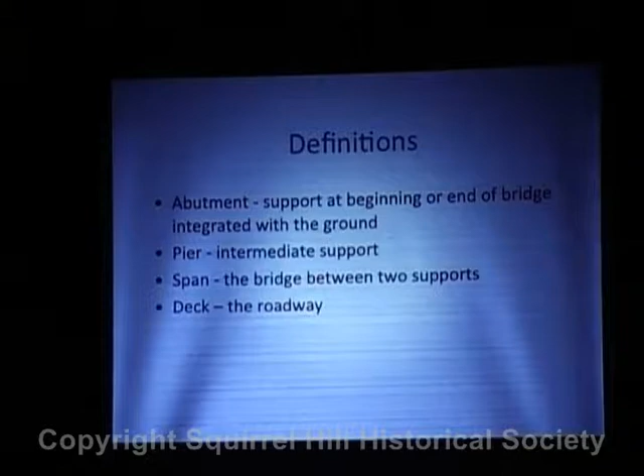So part one, introduction to bridge types. Now, before I go into this, I just want to give a few definitions. An abutment is the support at the beginning or the end of the bridge integrated with the ground. The pier is the intermediate support of the bridge, so the abutments are the end supports, the pier is anything in the middle. The span is the bridge in between the supports. And the deck of the bridge refers to the roadway of the bridge.

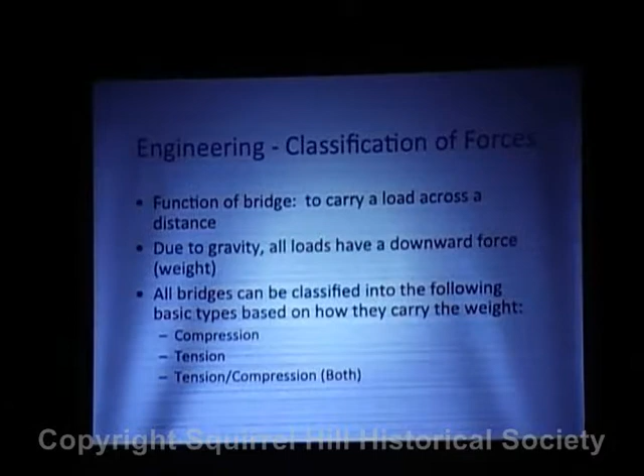So engineering, classification of forces. The function of a bridge is simply to carry a load across a distance. Due to gravity, all loads have a weight, and bridges can be classified based on how they carry that weight. Now, you've probably heard presentations talking about a visual approach to classifying a bridge: if you see this shape, then it's this type of bridge. Well, as an engineer, I can tell you that's not the case. Based on compression, tension, or a combination of both, as well as other configurations, you can accurately classify bridges.

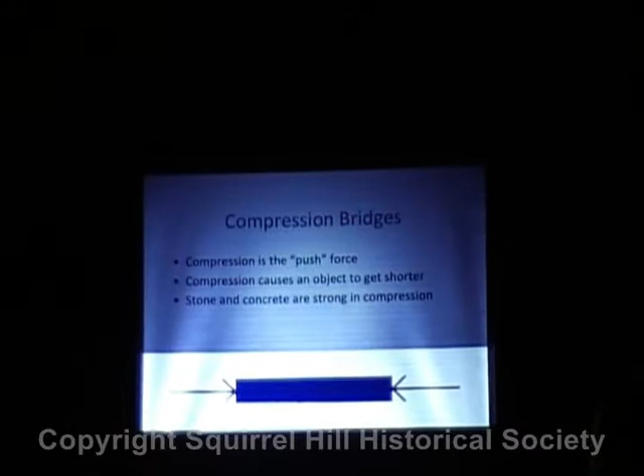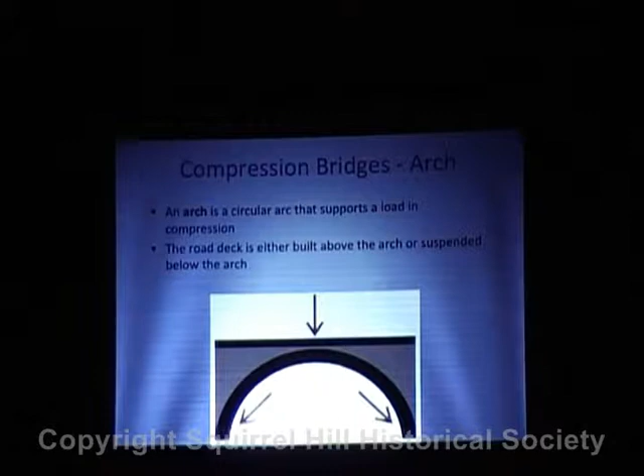Now, a tension bridge is a bridge which is supported by this pull force, tension. Tension causes the object to get longer. Materials strong in tension include wire rope, eye bars, and rods, like steel rods. You think about a rope. If you push a rope together, there's no strength. But if you pull it apart, you get the strength.

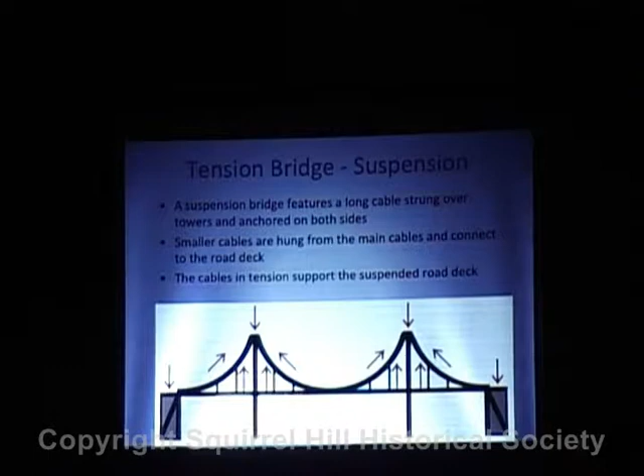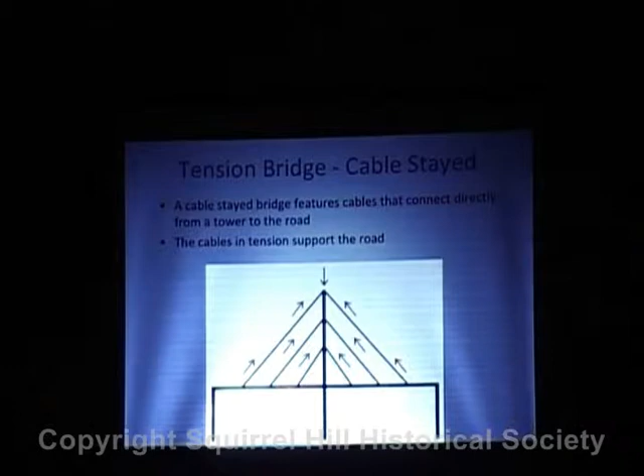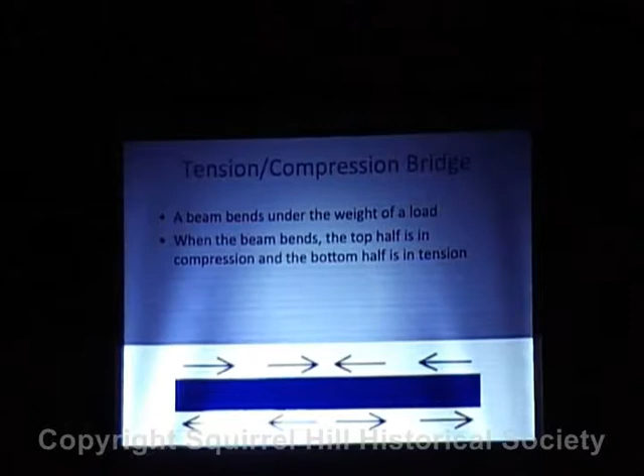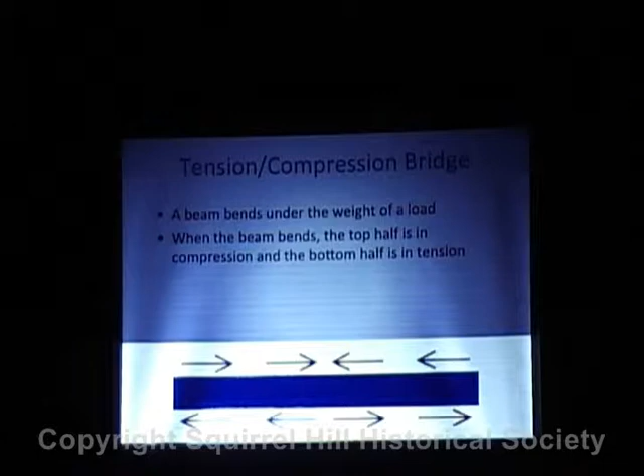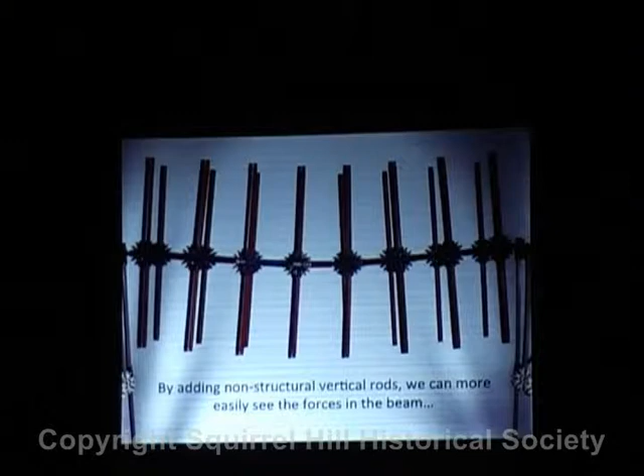Now, tension compression, what does that mean? Well, when a beam undergoes a load, the top of the bridge is in compression, and the bottom of the bridge is in tension. Now, I know that concept is a little hard to see, so I made a little model. This is just the simple kid's toy, K'NEX. I've added vertical rods, and this will just show what's going on with the forces. These rods have no structural function.

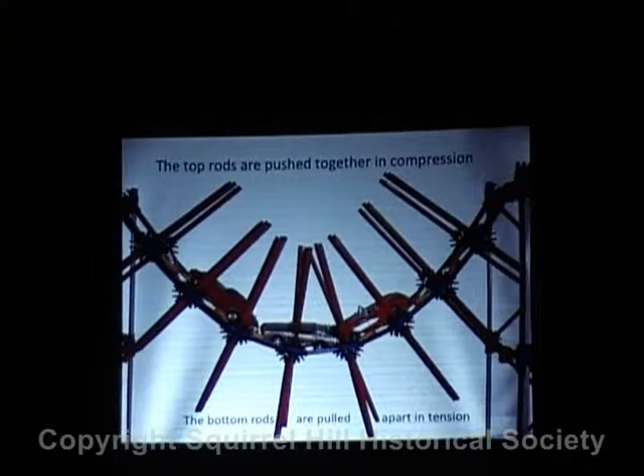Now, I'll apply a load, and as you can see, the rods on top come together, compression. The rods on the bottom are pulled apart in tension. So beam bridges exhibit both. Here's an example of a beam bridge. This is a concrete box beam.

Another example of a tension compression bridge is a truss. To achieve greater and greater strength, a beam needs to be taller and taller. However, a tall beam uses a lot of material and is very difficult to erect. If you consider transportation technology in the 1800s, you couldn't bring in a several-hundred-foot-long girder that's 20 feet high like you can today. You couldn't put that on the back of a horse and buggy. So engineers came up with truss bridges, where you take materials, put them together like an erector set, and come up with a bridge. And these trusses are distinctive with their triangular shape.

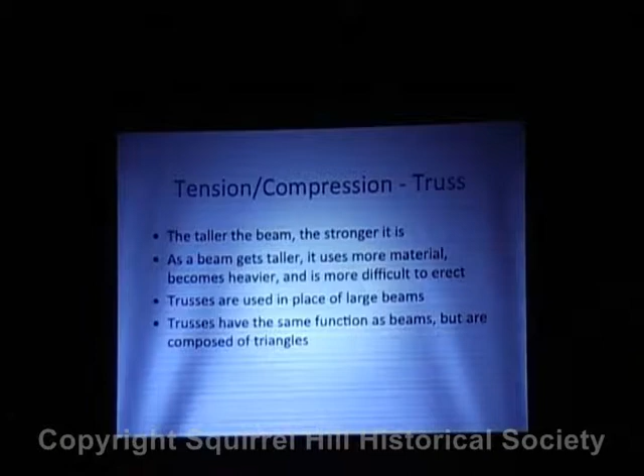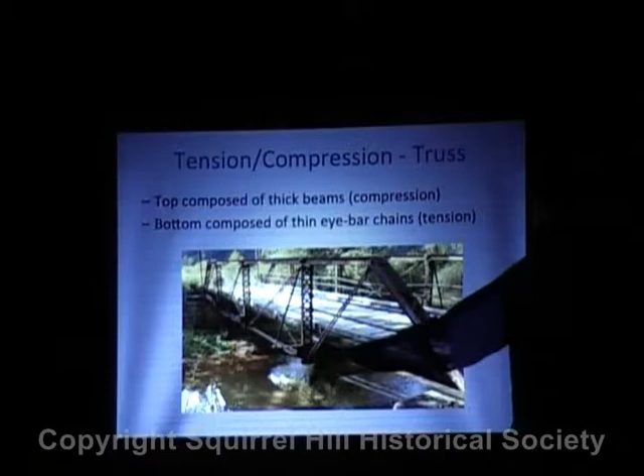Here's an example of a late 1800s truss bridge in Washington County. Note that the top of the bridge has thick built-up members in compression, and the bottom of the bridge has these thin eye bars in tension.

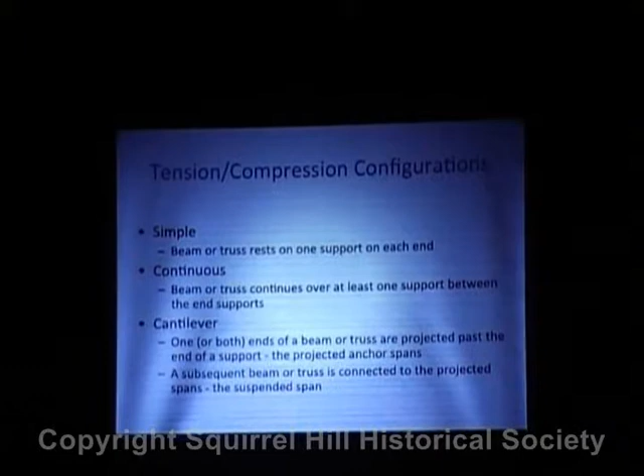Now, these beam bridges have a few different configurations. If the bridge is simple, the beam or truss rests on the support at each end. If it's continuous, the beam or truss continues across at least one pier. And if it's a cantilever, two beams are projected outwards over a pier, and then there's a center span that's hung from these projected spans. The reason you do that is it gives you a longer span length.

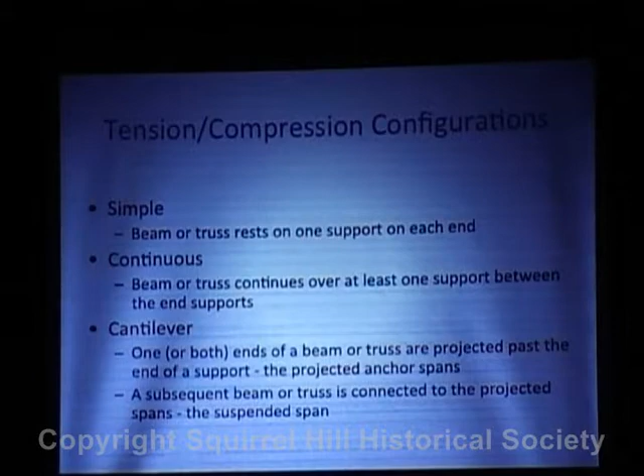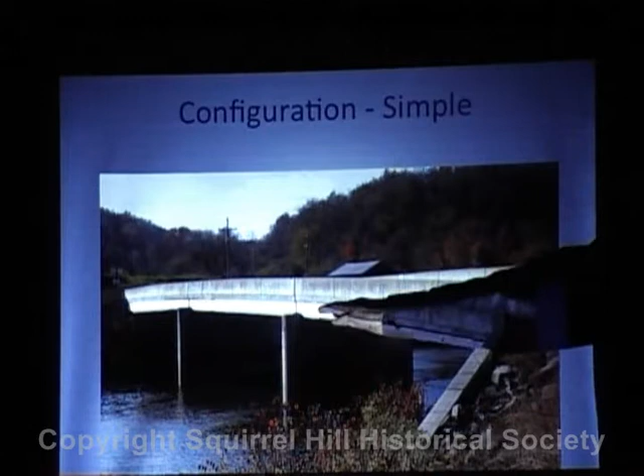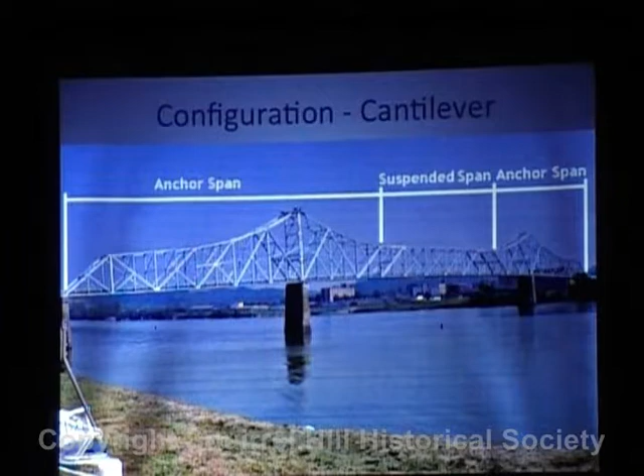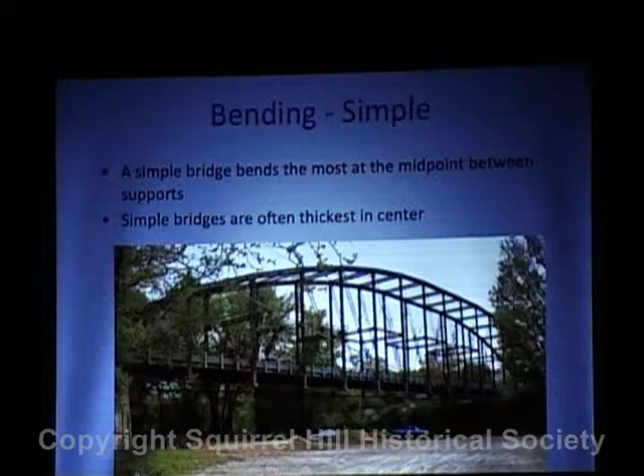Now, any comparable bridge you see that has a flat top, well, it's inefficient, using materials where you don't need it to be nearly as thick on the ends. Now, this bridge has a main span of over 400 feet, which is why it needed to be thicker at the top. Now, just go back for one moment, please.

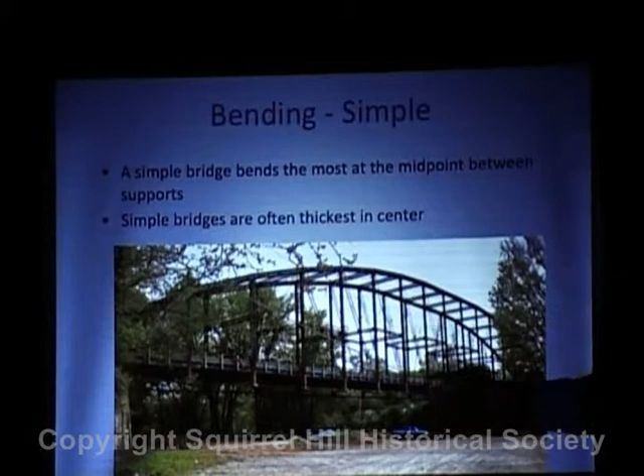One thing I want to note about this bridge, it is not an arch bridge. Even though it has a circular top, it's not because of compression, it's because it's curved upwards to counteract the larger force pushing down in the middle.

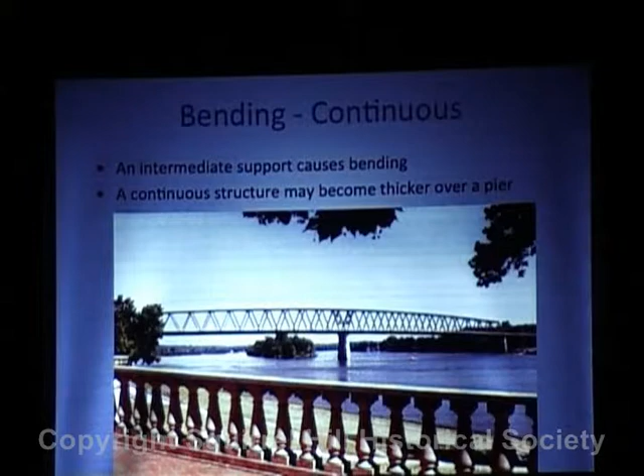For a continuous bridge, there will be bending over an intermediate support. If you're loading the bridge here and you're loading the bridge here, you'll have a bending action over that support. So, therefore, they may be thicker over that pier. And with a cantilever bridge, it's the same thing, where again, you have bending over these supports for the suspended span. That's why they need to get taller at the tower.

Now, if any of you have ever seen our materials for Beaver County, in their logo they show a suspension bridge. But the bridge they're actually talking about is a cantilever bridge. Cantilever bridges have towers, suspension bridges have towers. But you can see it's because of the bending that the cantilever bridge needs to have a tower.

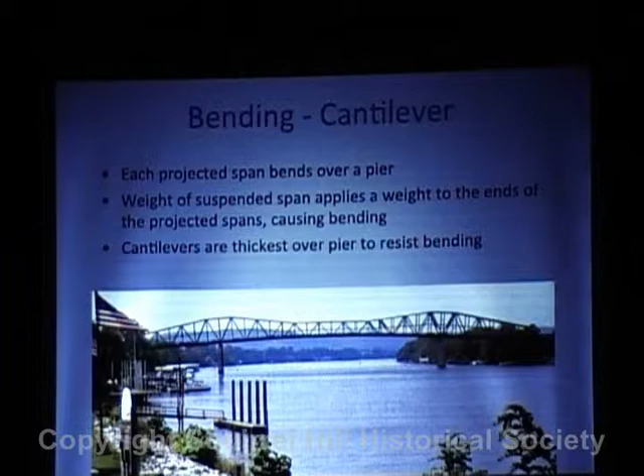Can I ask a question? Yes. When do you choose what type of bridge you're going to put over that water or railroad or whatever you're using the bridge for? Well, a lot of times it's based on the site conditions, where if you need vertical clearance underneath the bridge for, say, a railroad or for navigational clearance for a river, you tend to go with a bridge like a through or a pony where the support structure is above the road. If the bridge is higher, like over a valley, it makes more sense to put the support structure below.

Now, the difference between pony and through is that ponies are typically smaller bridges and throughs are typically larger bridges. And with a half-through, this type is built so rarely that it's a very special case where you'd see them. In all of western Pennsylvania, there are only 2 examples. And it's a situation where it helps to have some of the bridge below the road, but maybe you can't fit all of the bridge below the road because of clearances.

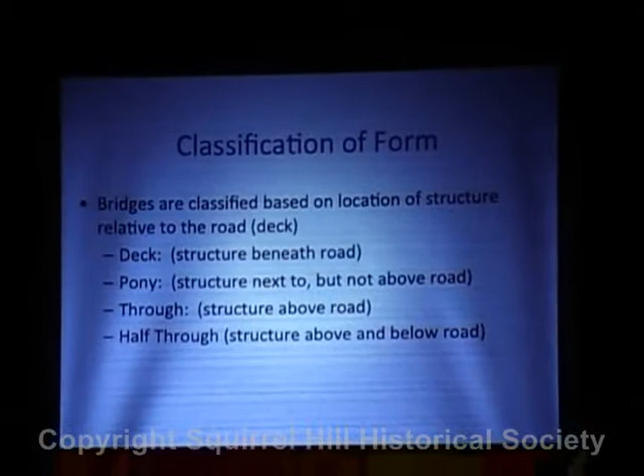What about the covered bridge that used to be, and you don't see anymore? Covered bridges are through truss bridges that just have a covering to protect the wood. So typically covered bridges are simple through trusses. Why was the covered bridge built?

Because of early materials. You have a lot of trees growing near the bridge, and when you're talking about the 1800s, where you don't have a lot of materials either at the site or easily accessible to the site, you cut down trees and build a bridge. You cover it up so the wood doesn't rot. Just like with stone bridges, you could quarry the stone near the bridge, but with steel bridges and concrete bridges, you needed more equipment, factories to get that material and bring it to the site.

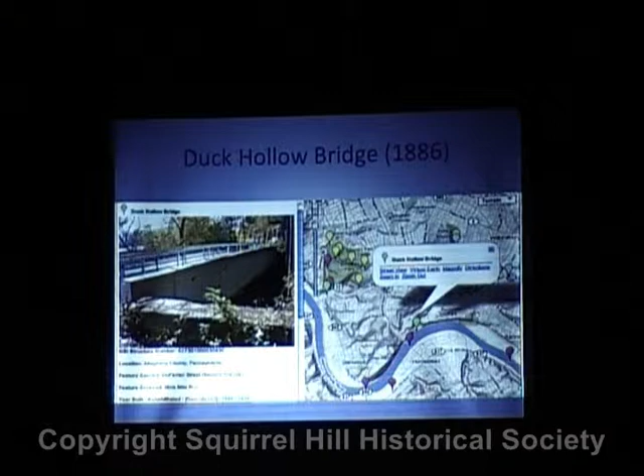Now, the bridge carries McFerrin Street, which used to be 2nd Avenue. 2nd Avenue used to run all along the river through 9 Mile Run. There were even connections through what is now Frick Park up to Regent Square. And the bridge was constructed in 1886 and rehabilitated in 1936. Now, I can't find any account to really determine how much of the bridge was rehabilitated or reconstructed. I'm not convinced that the support structure of the bridge is from 1886, but I can't prove or disprove that.

Now, this bridge is actually eligible for the National Register of Historic Places because it was one of, if not the first bridge, to use an open grate deck. In Bob Regan's Bridges of Pittsburgh book, he does state this is the first bridge ever built with an open grate deck. The original wooden deck was washed away in the Great Flood of 1936, and it was replaced by a grate deck.

Now, the bridge is also located in a very important historical site, the mouth of 9 Mile Run at the Monongahela River, which is known as Brown's Landing, near the Highland Station of the B&O Railroad. And salt works operated in that area in the mid-1800s.

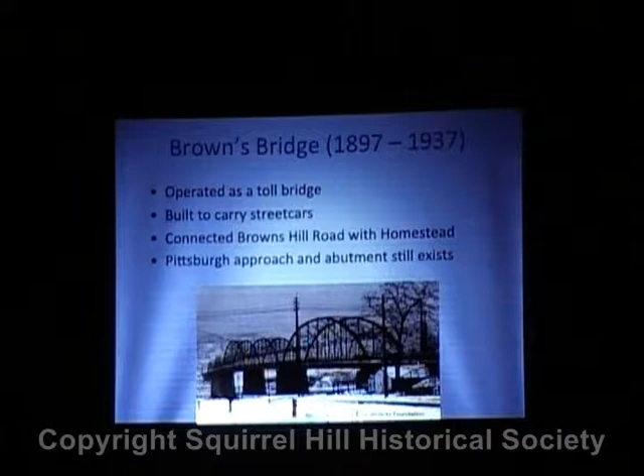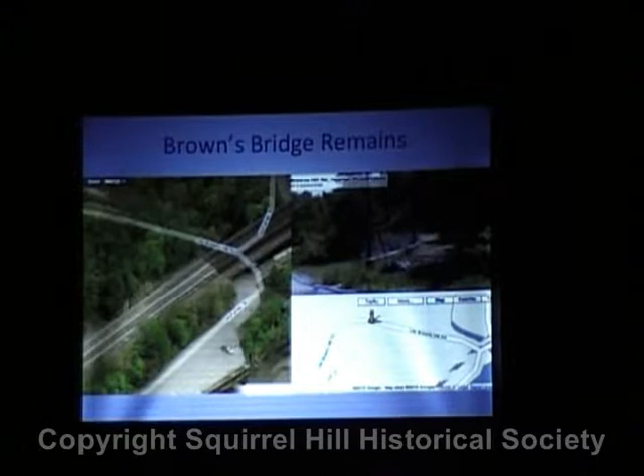You're saying that's the approach to the old bridge? Yes, the old road came up here, and right here is this abutment, crossed the railroad tracks and went across the river to Homestead. Can you easily see it, or is it covered? Well, it's very difficult to see it from the Squirrel Hill, Hazelwood side, because of these active railroad tracks, and then there's a drop, so these trees tend to obscure the view.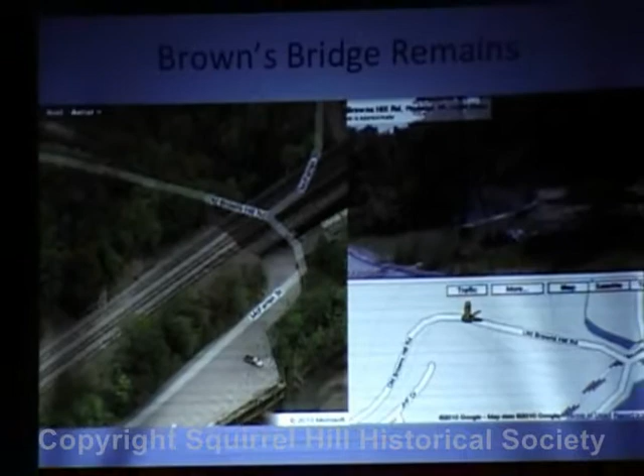If you're interested in seeing it, you could, I guess, park on Old Browns Hill Road or walk up Old Browns Hill Road and walk along the old alignment. And you can also see the stones from the other side of the river. So if you're dining at Uno's or Eden Park, you can look across and notice that abutment. That's actually the first time I noticed the abutment. Now, that bridge was replaced in 1936 by the Homestead High Level Bridge that we all know and love.

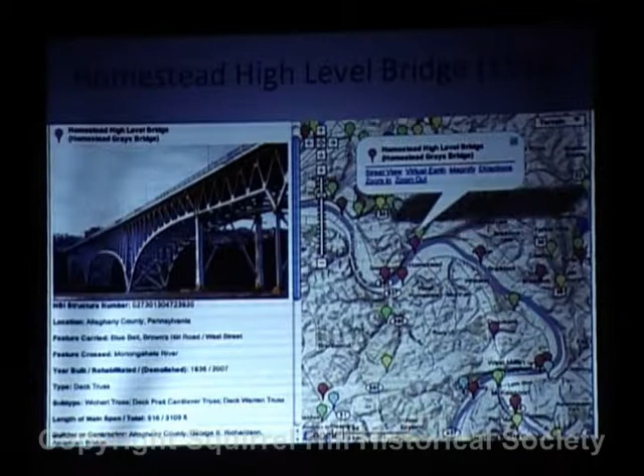The bridge was built from '35 to '37. Now, the bridge was designed in-house by Allegheny County. At one point, Allegheny County had about 100 engineers working for them. It was part of County Commissioner Joseph Armstrong's ultimate highway system of 1924, where he reorganized the county's Department of Public Works and decided that the engineers were going to work for him and completely eliminate the need for engineering consultants.

Now, I work for an engineering consultant, so, now...

While the County Department of Public Works got really big at that time, there was also a lot of patronage and scandal. As a result, the Democrats were able to unseat the Republicans at the time, which has held true ever since in this area. And they were going to shut down the large Department of Public Works.

But then with the Great Depression, the federal government for the first time started paying for infrastructure improvements. And as a result, since Allegheny County taxpayers no longer needed to pay for all this work the county was doing, the Department of Public Works stayed large and still built very innovative bridges through the Second World War. The bridge is also noteworthy for being over 3,000 feet, one of the 10 longest bridges in the country at the time, and has two main spans of over 500 feet.

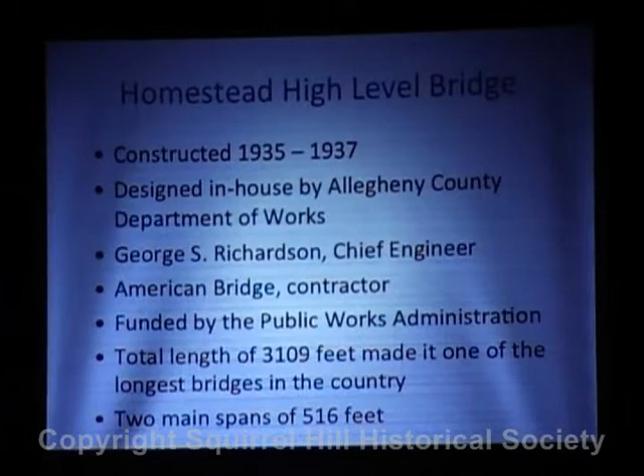Now, what's really significant about the bridge, if this isn't significant enough, is this Wichert truss. And I pronounce it Wickert because anyone I know who worked for Allegheny County pronounces it Wickert. This was the first ever example of a Wichert truss. Now, the Homestead High Level Bridge is a continuous truss, where you see the trusses continue along over piers. The problem with a continuous truss before computers is if there's a truck before a pier, what's going on with the bridge after the pier or after the next one? It was a very difficult problem, and as a result, engineers never really built continuous truss bridges.

So what Wichert developed was a diamond shape that is hinged. There's two hinges here, it's hinged here, two hinges here, and here. And what all those hinges allow is for each of these members to move. Now, I'm sure you've sat on the bridge and you feel it. This is why, because of all these hinges. As a result, if there's a truck loading this span, that span isn't affected. Each span on a continuous truss is statically determinate. So that's the advantage of this type, and about 5 other bridges like this were built.

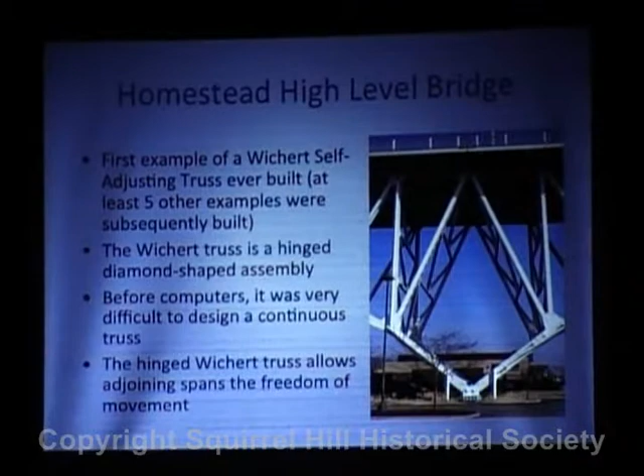Are they built for structure or aesthetics? Predominantly bridges are built for structure. The only time bridges were built for aesthetics were from the city of Pittsburgh and Allegheny County between, say, 1910 and 1940. And at that time, at least the city had a very influential art commission that mandated the design of bridges. The 6th, 7th, and 9th Street bridges were supposed to be truss bridges, but the art commission said no, throw those designs out. We want suspension bridges. So that's why they look the way they do.

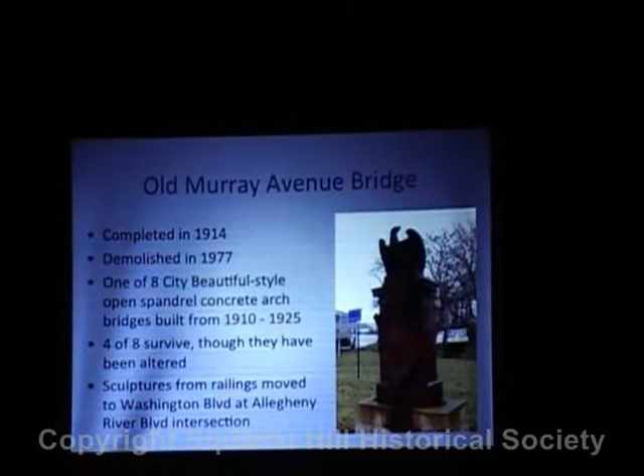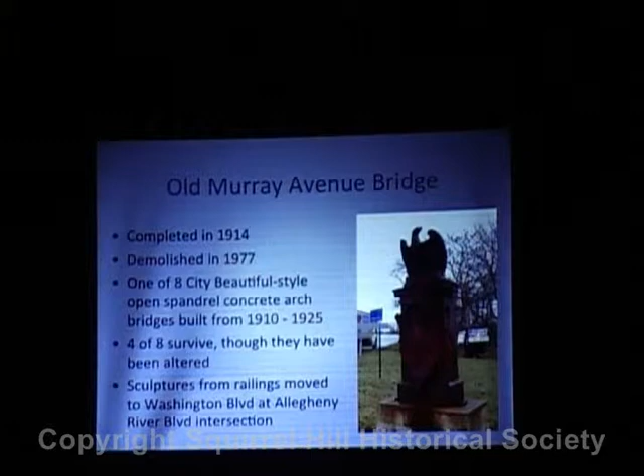Now let's talk about the Old Murray Avenue Bridge. This sculpture here is from the Old Murray Avenue Bridge. The structure was completed in 1914 and lasted until 1977. Starting in about 1910, going through the mid-1920s, the city of Pittsburgh built 8 City Beautiful style open spandrel concrete arch bridges. Only half of them still survive. These sculptures were moved to the intersection of Washington Boulevard and Allegheny River Boulevard. And on the next slide, there's an image of the bridge, and you can see the sculptures right here.

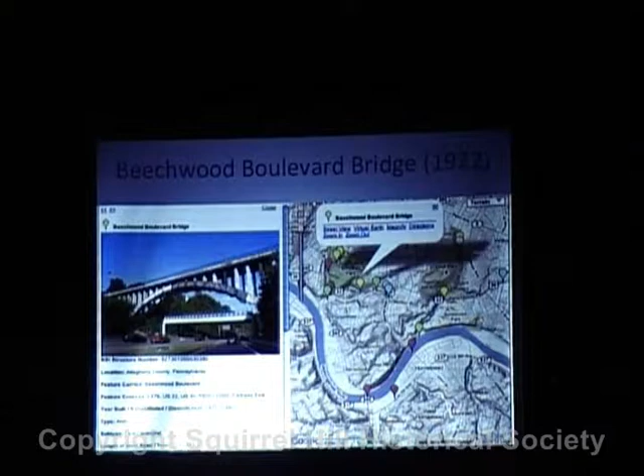Now, another one of these City Beautiful concrete arch bridges is the second Beechwood Boulevard Bridge. And I say Beechwood Boulevard Bridge rather than Greenfield Bridge because it's inscribed in the plaques, Beechwood Boulevard Bridge. Well, since then, the city has erected a sign that says Greenfield Bridge. So call it what you will.

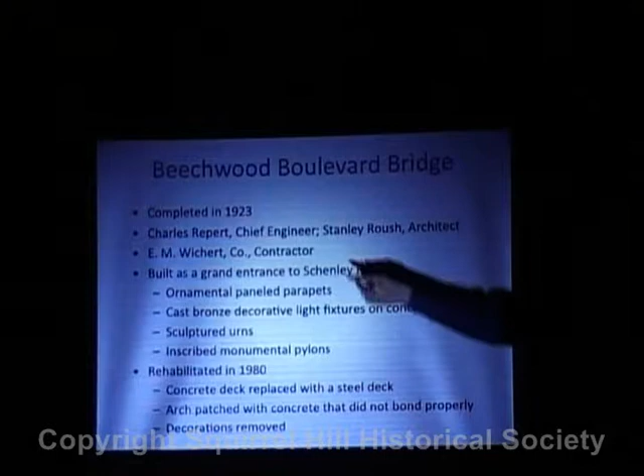Now, the bridge was completed in 1923, and the contractor was Wichert, the same guy who invented the Wichert Truss. Now, the bridge was built to be very beautiful, to be an entrance to Schenley Park. They had ornamental panel parapets, cast bronze light fixtures, sculptured urns, and these monumental pylons, which still exist.

Now, in 1980, the bridge was rehabilitated, everything but the arch was stripped, and a new deck that's made of steel that didn't match the original bridge was installed. The arch was patched, and unfortunately, the concrete they used to patch the arch didn't bond properly. That's why all that new concrete is falling off the bridge.

Now, keep in mind that arch is about 20 feet tall. So says my friend who was working on the project. So the bridge can still lose a lot of concrete and still be strong.

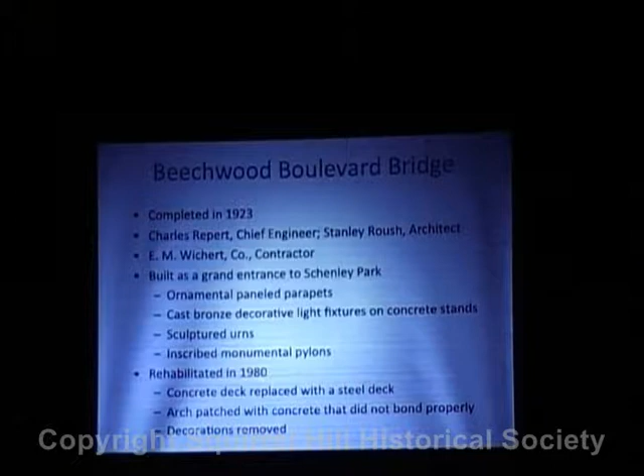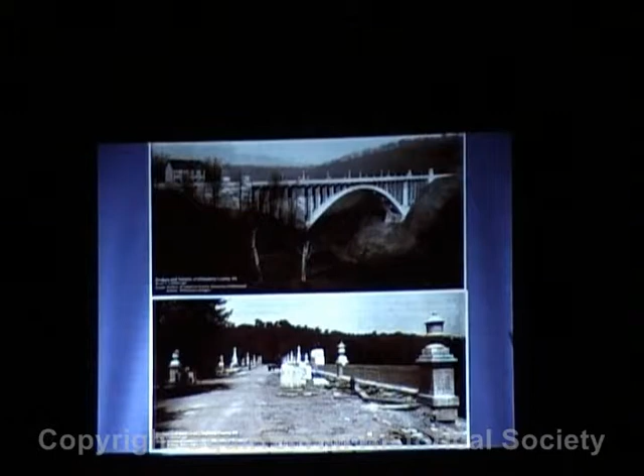And here are pictures of what this bridge used to look like. You can see how the urns and lampposts went across the entire deck of the bridge. Now, compare this with the view today. Oh, wonderful.

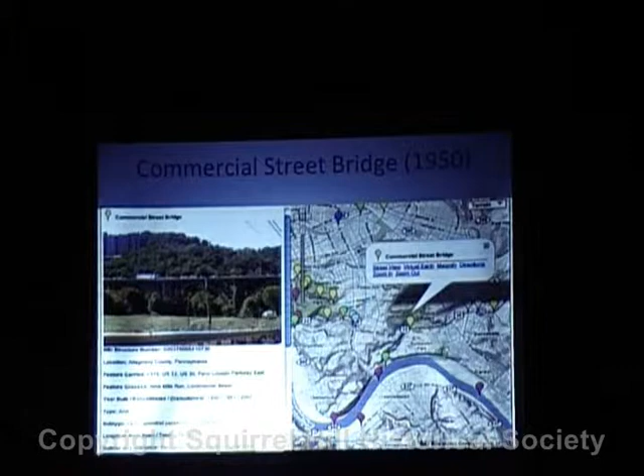Another notable bridge is the Parkway East Commercial Street Bridge, which was completed in 1950 and built by the state. After the Second World War, the state got a lot more involved with building new infrastructure and major roads. And the bridge is one of only 2 concrete arch bridges built for the Parkway.

Another one of the Parkway East bridges is the Fraizer Street Bridge, which is an example of a deck truss, and it was also completed in 1951. Now between that bridge and the bridge over Saline Street in the 4-mile run section, they're the busiest bridges in our neighborhood, carrying 120,000 cars a day.

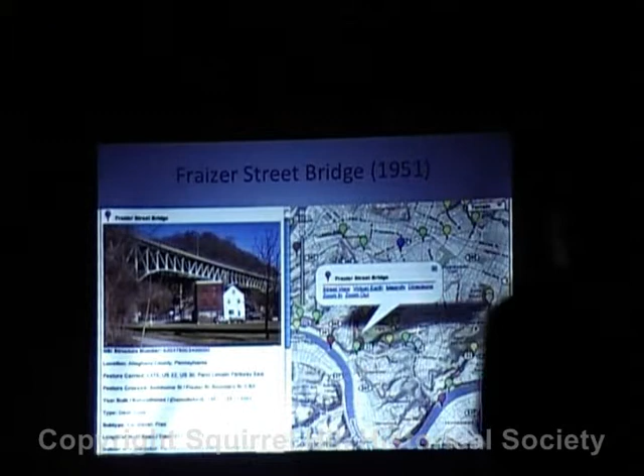Now this bridge is actually, and if you go back one slide please, the bridge is actually composed of 2 parallel bridges. You look, there's a line here where the bridge on this side is separate from the bridge on the other side. And it's the longest parkway bridge over the valley, and the bridge, as well as all of the parkway's original structures, are eligible for the National Register.

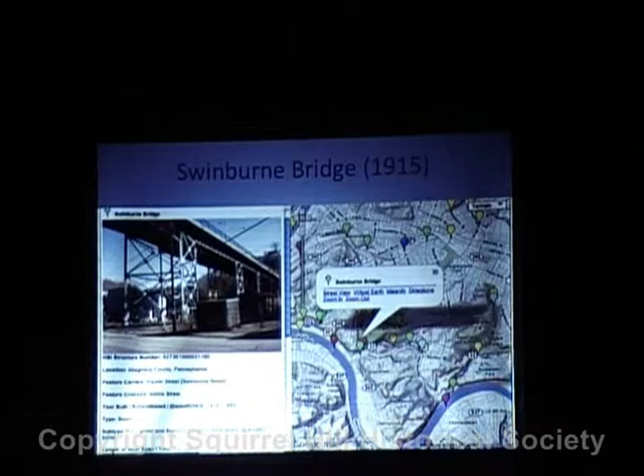Now the Swinburne Bridge, which is perpendicular to the Fraizer Street Bridge, you can see that here, actually carries Fraser Street, where Fraser Street is perpendicular to Swinburne Street, and part of Swinburne Street was demolished when they built the Parkway East. So that's why if you're on 2nd Avenue, you'll see Swinburne Street reappear.

Now it replaces a previous trestle, and this bridge is built as a combination of girders above and below the road. Now, most of the old city bridges were trestles. This is the last one that's left.

Now, in Schenley Park, the original Boulevard of the Allies Bridge was the Wilmot Street Bridge, and it was built in 1907, an example of a large arch bridge, one of the few metal arches rather than concrete arches. The reason this bridge was a metal arch is it was so much bigger than the other arches built at that time, and it lasted until 1939. It was replaced by the current Charles Anderson Memorial Bridge.

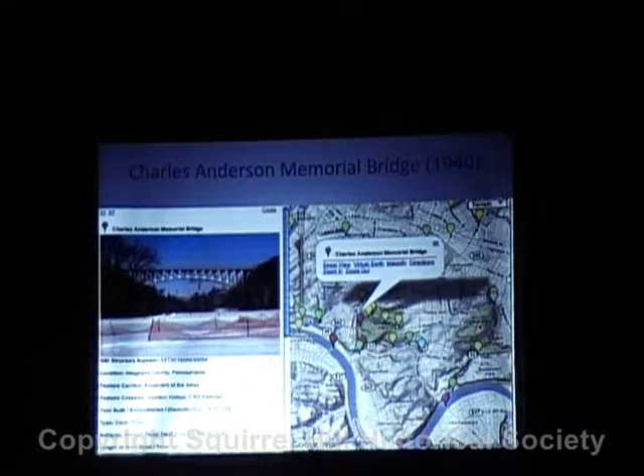Now note with this bridge, you have the open diamonds like the Homestead High Level, because this is our region's other Wichert truss. And by the way, the stone piers for the Wilmot Street Bridge still remain, so if you're walking on the trails in Schenley Park, you can see those stone piers. The bridge is noted for its Art Deco style pylons and railings.

And Charles Anderson was a plumbers union labor leader, a supervisor for the Department of Labor during the First World War, and then at the Pittsburgh City Council. And here's what the bridge looks like today. The original railings are still here, as well as the Art Deco pylons.

Now let's talk about the bridges of Schenley Park, including some bridges that are actually in Squirrel Hill. Now the land was known as Mount Airy, and it was owned by the Captain Edward Schenley family. Now in the 1860s, Councilman William Phipps proposed that the land, which was still undeveloped, or maybe there was some light farming, but it wasn't developed as some of the other area around it, would be converted to a park. There was a referendum, and the residents said, well, we don't need a park. We could just go out a little bit. There's plenty of woodlands. Why do we need land to become a park?

Well, in the late 1880s, development was encroaching and the land was actually considered for housing. So Edward Bigelow, who was the director of Pittsburgh's Department of Public Works, raced to London, literally raced to London, to be there first to convince Mary Schenley to donate or sell the land as a park, and some of the land was donated, some of it was sold. Now the original bridges in the park were rustic bridges. They were constructed of wood.

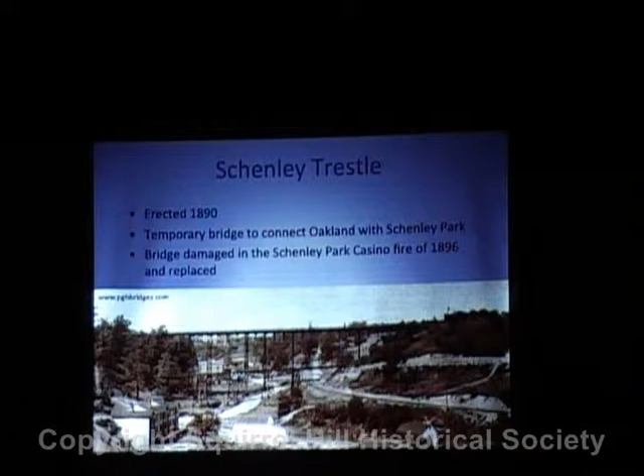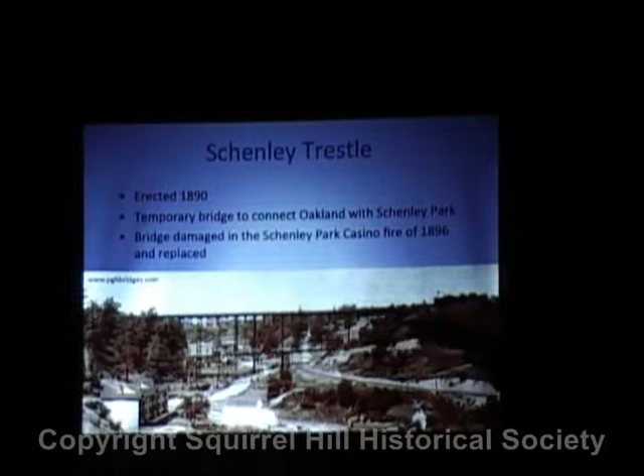Now, one of the first bridges built into the park, notice it was built in 1890, where the park was established and was purchased in 1889, was this trestle, which you can see is definitely not suitable for modern traffic. And when the casino in Schenley Park, which had one of the first indoor ice skating rinks, burned in 1896, it damaged this bridge, so they replaced it.

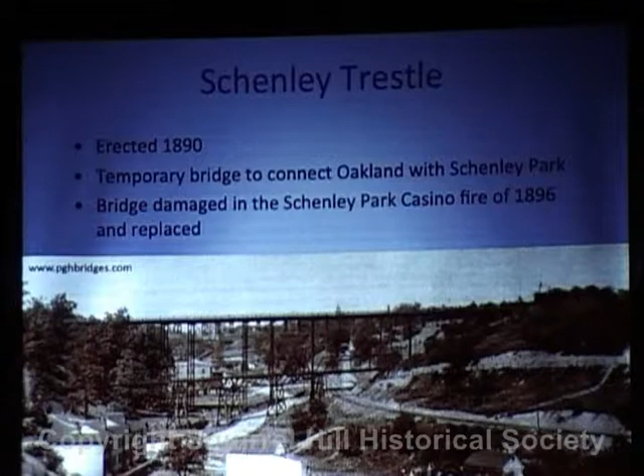By the way, this lower bridge was built as a streetcar bridge for a line that was supposed to go through the park, and Bigelow was successful in getting the line shut down and removed. Now, with the fire damaging that bridge, instead of just replacing that bridge, they decided, let's just build 3 bridges. So the first is the famous Bellefield Bridge, which was between the library and Forbes Field.

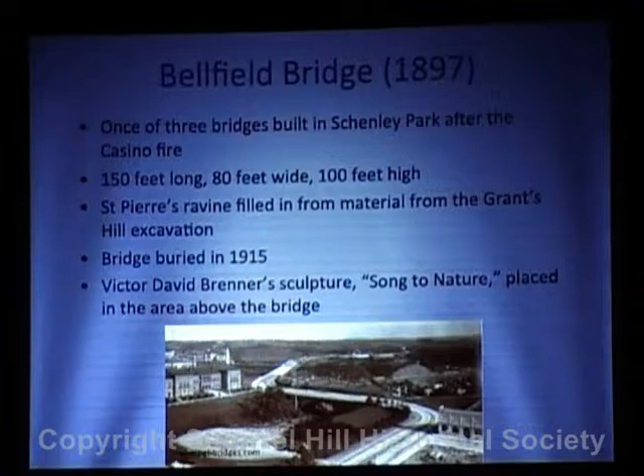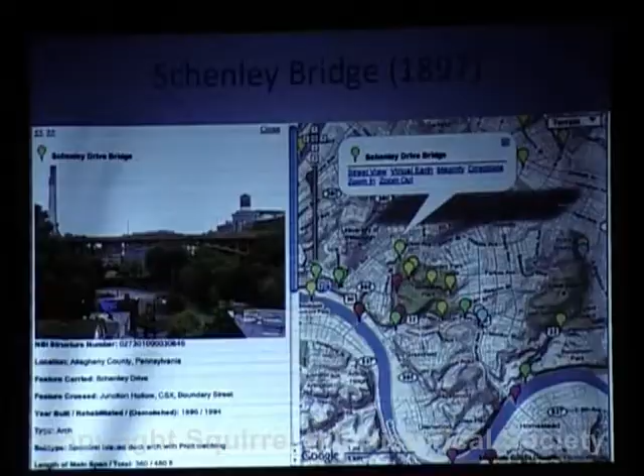Now, in the 1910s, this ravine was filled in by land excavated from Grant's Hill downtown. So the bridge was buried, and now the sculpture Song to Nature is located approximately above where the bridge still stands. Now the next bridge, which also still stands and is a little easier to see, is the 1897 Schenley Bridge. This bridge replaced the trestle. What's really noteworthy about this bridge is it's a 3-hinged arch, and I'll explain that when I discuss the similar Panther Hollow Bridge. The bridge is listed on the National Register of Historic Places.

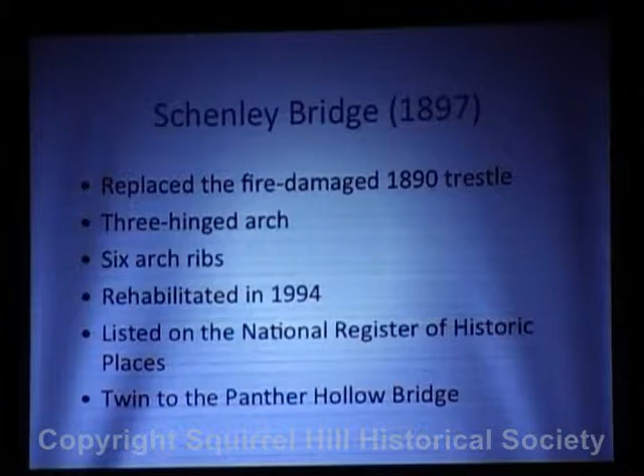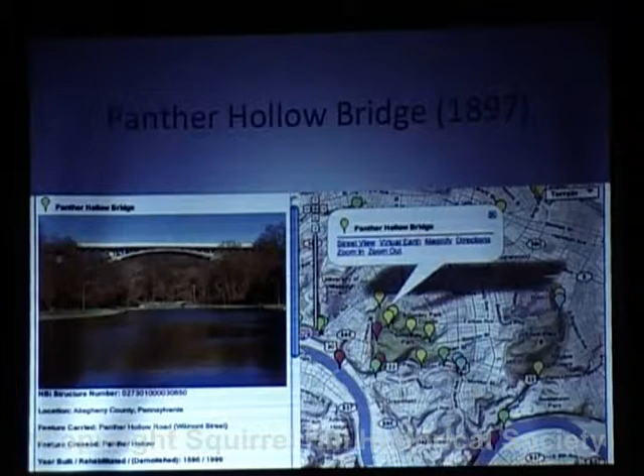What qualifies a bridge to be historic? There's a variety of categories; not every old bridge is historic. Typically, reviewers look for a bridge that was technologically significant, meaning that this bridge had some sort of detail or feature that pioneered or advanced bridge design, or, say, they tried something different which didn't succeed. So some noteworthy feature. Todd, yes.

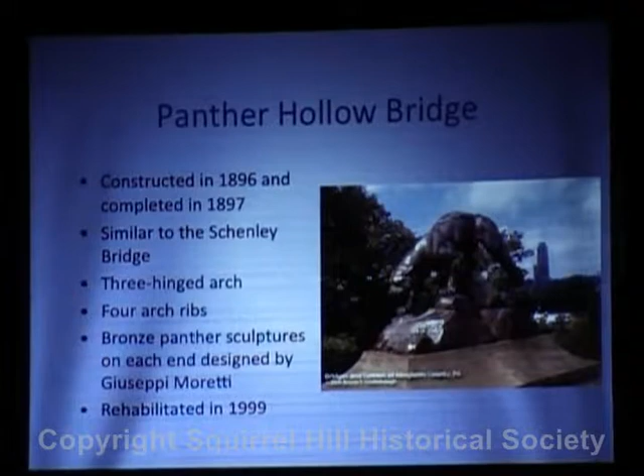The terms for the National Register would also allow it to celebrate a particular engineer or architect. Absolutely. If they're famous, you could get on the register. For example, any of Roebling's or Lindenthal's bridges, who built bridges in Pittsburgh, would almost definitely be eligible for the National Register. And with historically significant, not just the engineers, but also if there was an important historical event that happened on the bridge, or if the bridge is determined to be contributing to a historic district.

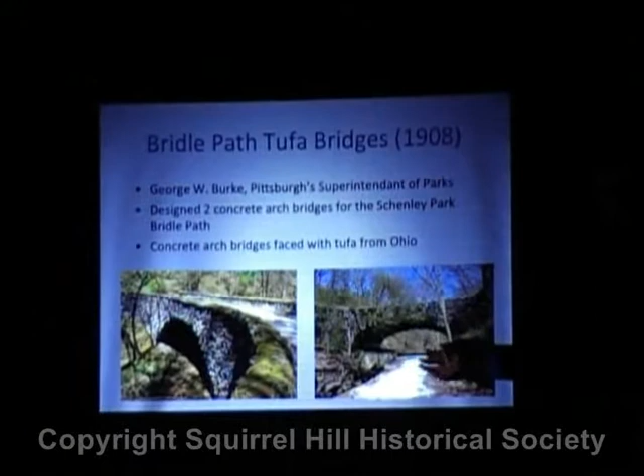Now, the Panther Hollow Bridge is a little bit more famous than the Schenley Bridge due to the panther sculptures. The bridge is also a little bit different because there are 4 lines of arches below the deck. The Schenley Bridge actually has 6 lines of arches. Now, in Schenley Park, there are also these beautiful tufa bridges, which are standard concrete arch bridges, but to be decorative are encased with this tufa, this porous crystalline material that came from Ohio. These bridges were installed in 1908 when the bridle path was created for the park.

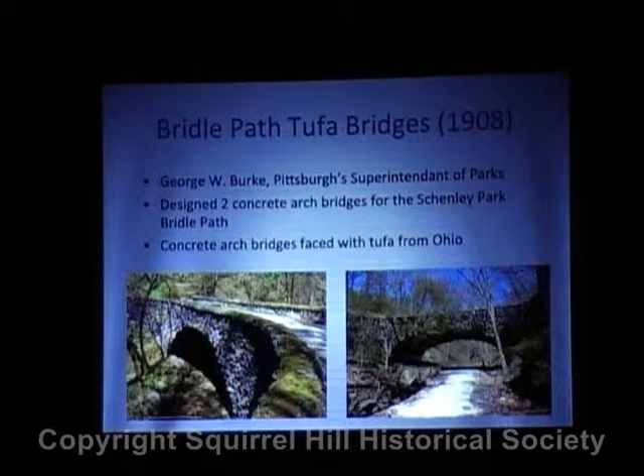Now, if you've noticed the little stone bridges in Schenley Park, these bridges are actually a lot newer than those tufa bridges. These bridges were built with federal New Deal funding in the 1930s by the Works Progress Administration. 15 of these bridges still survive, more or less. A lot of them are in pretty bad shape, including some where you walk across the bridge, and after the bridge is the stream, because the stream's covered the path. So, go to the next slide, please.

Now, part 3. We'll talk a little bit about bridgemapper.com. It was created by myself and Lauren Winkler, if you'll please stand. So, together, we developed the site Bridge Mapper, and currently we have over 1,000 bridges in 15 different states. Now, if you think that's a lot, there's still well over 1,000 bridges in 15 other states on my computer that haven't been uploaded to the site.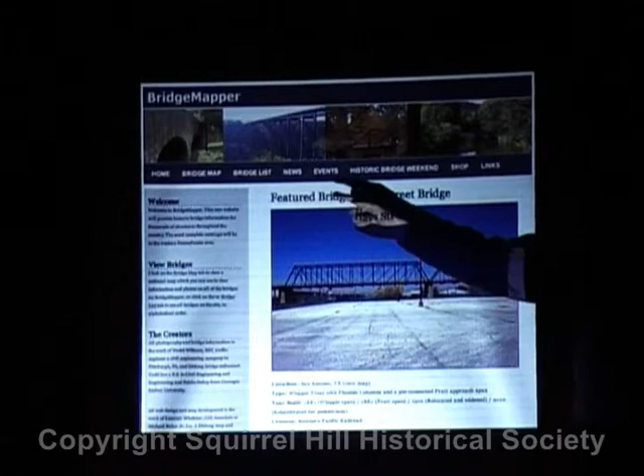The first way, say you click on Bridge Map. So you click on Pennsylvania. So you click on Allegheny County. Here's a map of bridges of Allegheny County. Now, I apologize, currently there are only 231 bridges in the county. I've seen about another 100, and I still have other bridges that I still have to photograph in the county.

Now, there are 2 different ways of finding bridges with this interface. And again, Lauren is the one who actually is the webmaster and designs this very innovative interface. This is a fully functional Google map, where you can zoom in and click on a bridge based on its location on the map. The other option is to click on it on the list. So let's say we click on the Glenwood Bridge.

This is what a typical data page looks like, where here's the bridge on the map, here's an image of the bridge with information. Now, there are other features too. You can click on Street View, and you can virtually drive across the bridge, anywhere that Google Street View is available. You can click on Virtual Earth, where you get an aerial image of the bridge. Now, you can't see what the trusses look like looking to the north, so let's rotate this image. There, that's better.

Now, with this site, trying to make it easy to find bridges, you can actually click Directions. Type in your address to the bridge and click Go, and that shows you how to get there. Now, the next way of looking for bridges is with the All Bridges tab, or link, and that shows you a Google map showing every bridge currently on the site.

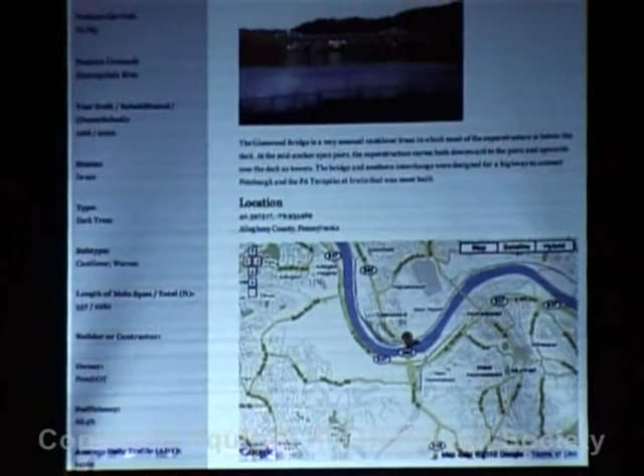You can either use the search feature to find a bridge, or you can zoom into the location on the map. Say we zoom into Allegheny County, and again we can click on the Glenwood Bridge, and there's a data page for it. And there's a Street View image that's below the Google map, which I couldn't fit on the screen.

Now, the third way of finding bridges is through this bridge list, where all the bridges on the site are listed in alphabetical order. Just keep going to the next page until you find the specific bridge you're looking for. Like say we go to page 13, here's the Glenwood Bridge. You click on the Glenwood Bridge, and then it's the similar data page. Now note that these data pages are useful if you want to link this to another site. The map-based pages do not have individual addresses.

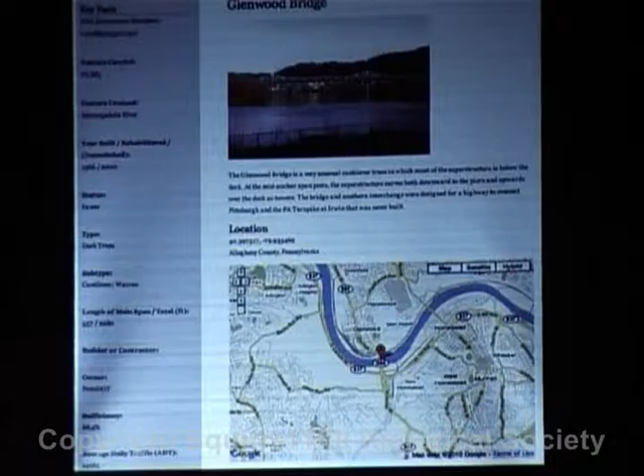All right. Lastly, we'll talk about what's going on with historic bridges in our area. Currently, any of these historic truss bridges that haven't been rehabilitated or restored will be gone within just 15 years. The federal government offers either transportation enhancement grants, which can pay up to 80% of the cost for a rehabilitation project, or Section 106 funding, in which the demolition money could be used to rehabilitate the existing bridge. The federal government also pays 80, in some cases 90% of the cost for a new bridge.

Now, our agencies are trying to do as much as they can with as little funding as they have. They simply just can't afford to spend more money to maintain historic bridges when they can spend just a little bit more and get a brand new bridge. So therefore, almost all of these historic bridges in the state are to be demolished, probably 95, 99% of these historic bridges. The only exceptions are famous urban bridges, like in the city of Pittsburgh, 31st Street, Panther Hollow, Schenley, Smithfield Street, and bridges that are supported by the community.

One example is the Donora-Webster Bridge, which is just south of Pittsburgh in Washington and Westmoreland County. This bridge is from 1906. If you notice, it looks a little bit like the old Browns Bridge. Well, when we think of Donora, we think of the Donora smog disaster. Well, this bridge was there. This bridge was involved in the story of that disaster.

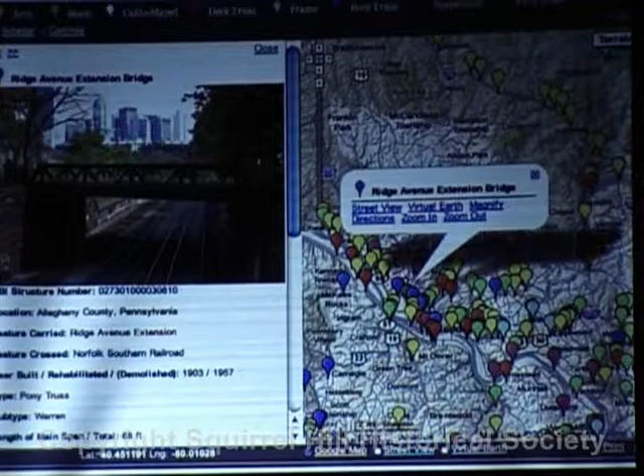The historic bridges in Allegheny Commons, Ridge Avenue, Ohio Street, and the pedestrian arch are all slated to be torn down. The Charleroi-Monessen, the other of the big multi-span early 1900s Monongahela River bridges, will be torn down in a few months, leaving the Monongahela River with just 2 old truss bridges. When I say old, I mean pre-World War I truss bridges: the Smithfield Street Bridge and the old Brownsville Bridge, which is a single-span bridge.

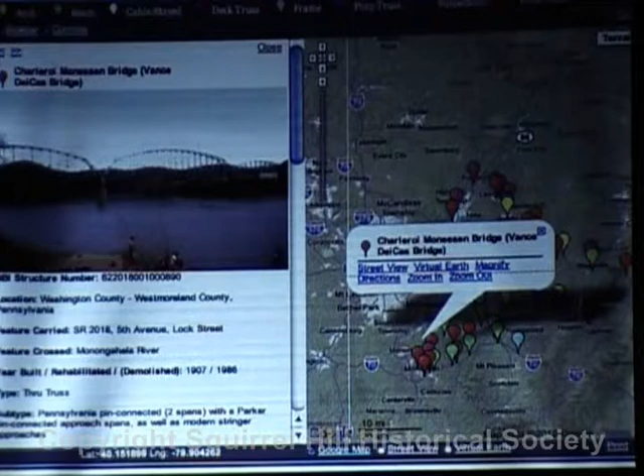Another example is the Dorrington Road Bridge. Until last year, it was Allegheny County's oldest unaltered truss bridge. You can see these are the original builder's plates by the Pittsburgh Bridge Company from 1888. The bridge had a 9-ton limit, served a 1-lane switchback, and was demolished and replaced with a 2-lane bridge starting last summer.

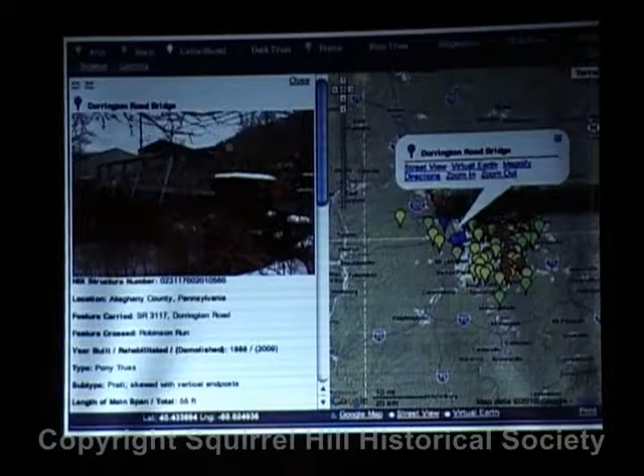St. Vincent High Bridge, which is a rare example of a pin-connected truss with X's. That bridge is now gone, and I've never seen another one like it. And the Davis Avenue Bridge was the last of the city's pre-1900 bridges over valleys. They rehabilitated it in the 1980s, but the contractor didn't do a very good job, and it ended up causing more deterioration. The city closed it until the bridge deteriorated to the point it had to be torn down.

But in Pittsburgh and in other parts of the country, the future can be bright for historic bridges. Here's a bridge converted to carry pedestrians in Grand Rapids, Michigan. They were having an art competition, Art Fest, on the bridge. You can see that table is the size of the bridge. There were other art displays on the bridge.

There's the Shelby Street Bridge in Nashville, where they added these river viewing platforms, decorative lighting, and other improvements. This is Calhoun County, Michigan, where once these historic bridges can no longer support traffic, some of them are moved to this bridge park, and they have trails going across the various bridges. And those are the bridges decorated for Christmas.

And this is in Shelburne Falls, Massachusetts. It's called the Bridge of Flowers, where they now garden this former railroad bridge. You can see all of that vegetation. So there are other ways that you can reuse bridges when they're no longer functional for vehicles. Unfortunately, other than in Pittsburgh and the rail trails, you don't see that around here. Any questions?